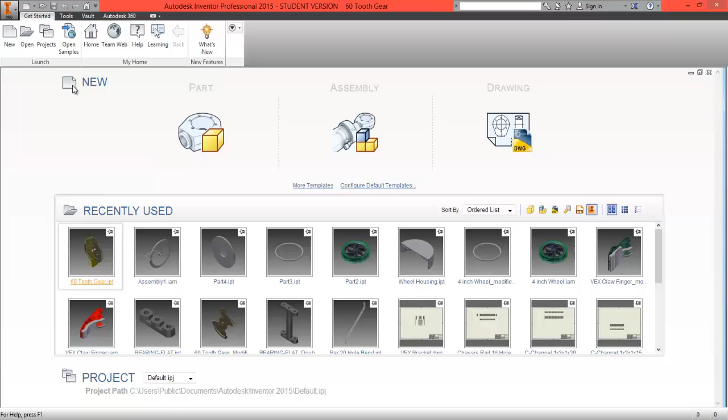In this video we're going to look at modifying some of the existing parts. One of the first parts we're going to look at is a gear. One of the gears from the existing CAD library that you have available is the 60 tooth gear. Click on open, locate the 60 tooth gear and open that file up.

Now, just to explain a couple of things about the existing parts. First of all, on the left hand side you have the iMates, and the iMates are the features that allow you to snap assemblies together. They're some of the features that will kick in during an assembly stage.

We have the base part, as you can see here, base 1, and if we were to expand the extrusion we'd see that effectively this model has been surface modelled, so it's not something that's very easy to look back at and modify. For example, it's not made up of consistent extrusions and cuts and revolves.

However, the part is available to add and subtract material from, because it's still now technically a solid part, and it has a number of features that allow us to do this.

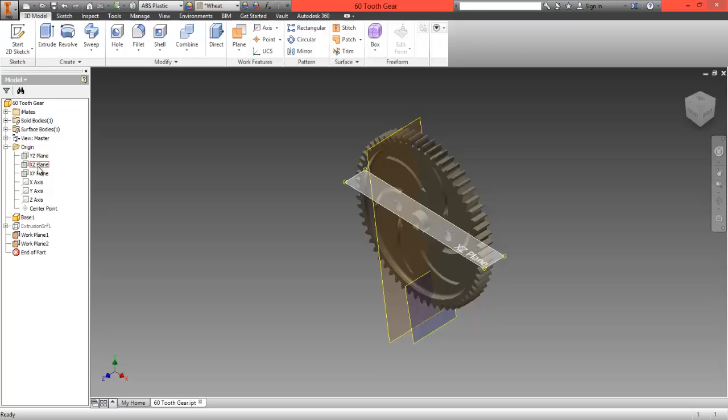For example, on the left hand side under origin we have the X, Y and Z planes and the X, Y and Z axes. Each of these allow us to produce sketches and allow us to revolve things. If we look at these two work planes featured here, click on this view cube on the top right corner and drag around, we can see that a couple of work planes have been created as well, which could help us to sketch a model.

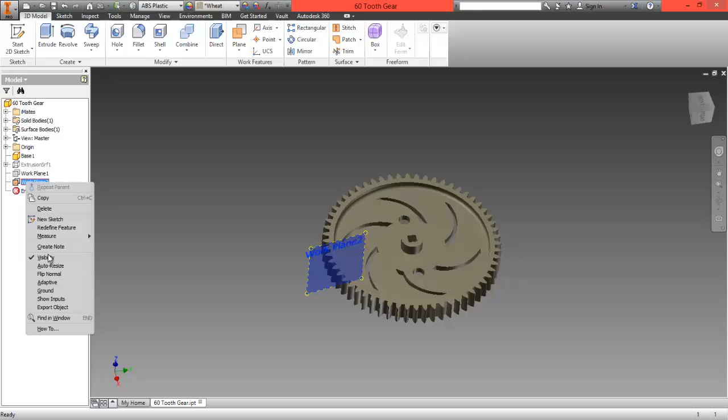One of the things I'm going to do here is right click on those work planes and untick their visibility to just clear up the view that I've got at the moment, and now I can look at the product properly. Now this part would 3D print absolutely no problem at all.

We can see that if we were to 3D print on the bed, this piece extrudes down below the surface, so then we'd have a large amount of support material just sitting underneath to allow it to 3D print. At the moment it's just an existing part, so it just replicates one of the injection molded parts that we already have. What we're going to do here is just do some very simple things to modify this part for an alternative 3D printed part.

So we can create in the top left corner on the ribbon a 2D sketch. Now there's lots of different things that we could select to do our sketch. We could click onto the surfaces, so we have numerous surfaces here, including this top edge here if we wanted to modify some of the existing features. We could click onto this surface here, or even the internal one.

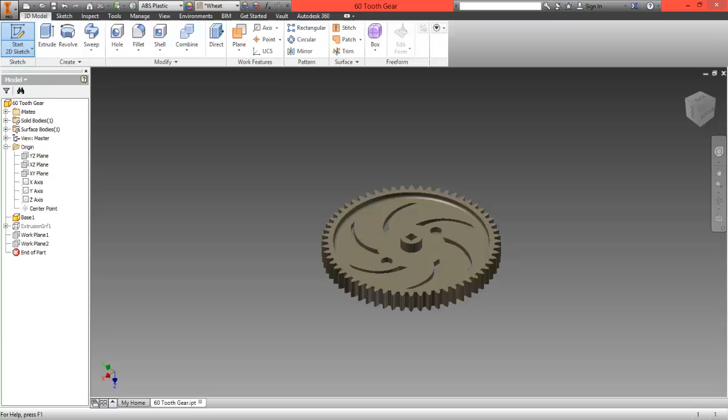So for example, if we want to actually modify this section here, we click on here and then it will rotate through to a 2D view. We also have on the left hand side the origins, so we can choose the YZ plane, the XZ plane and the XY plane, and we might like to sketch onto these, especially considering some of the planes intersect straight through the middle of the various different parts of this design.

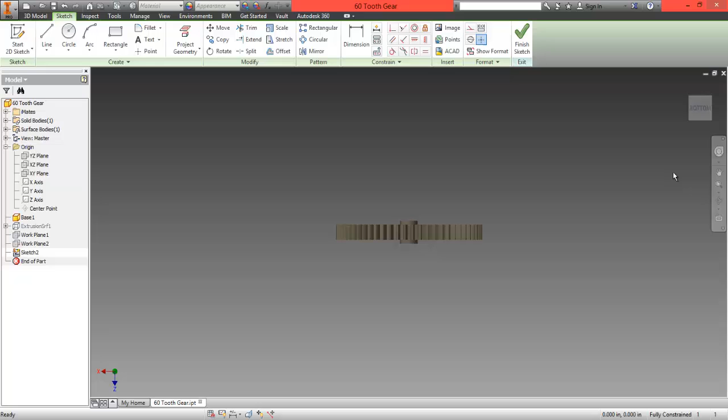In this instance what we're actually going to do is choose this middle plane, the XZ plane, and just select on that. Now this gives us opportunity to sketch right along the cross section here. I'm just going to rotate this round to the 2D view, and what we can do is sketch some kind of design feature onto this.

What this design feature is, is completely up to you. For example we might decide to sketch a series of additional extrusions. You'll notice that as I draw this circle I've managed to snap to the existing circle that is already featured here. If I click away from this momentarily, each of these pieces of line work are things that we can snap to. So if there are certain features you want to continue on from or to modify around, we can snap to these and use those as reference points.

We can also use project geometry, and under project geometry we have project cut edges. We can use these to make the geometry appear available, and here in yellow line work we can see what we actually have to snap onto on the very surface we're working on at that time.

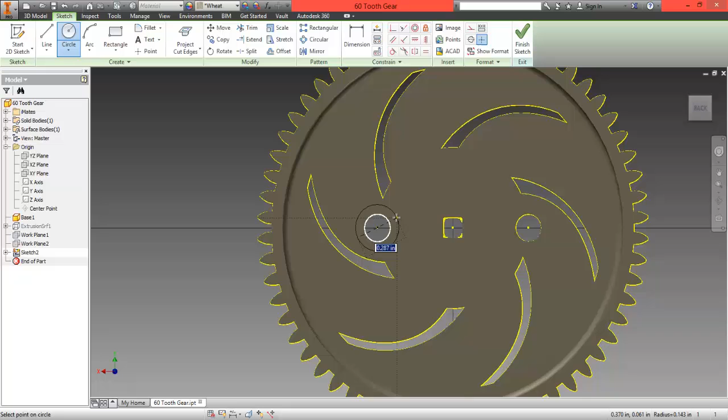What I'm going to do here is very quickly model a couple of circles, the first one here and the next one there.

If you're drawing your line work on a datum plane or surface that sits inside the physical product, you can press F7 and it will do a slice of the product, removing the material that's in your way. Now I can see my line work quite happily, plus all the cut projected edges as well.

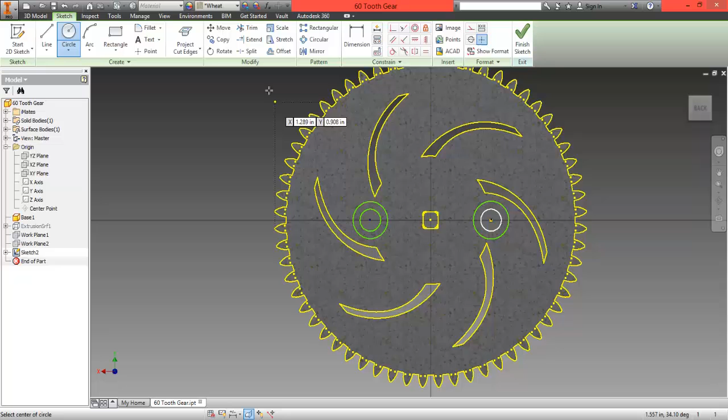So I can continue my line work, and this will probably end up looking like green line work because we're not working parametrically yet. If we set dimensions to each of these we will have some parametric modelling going on.

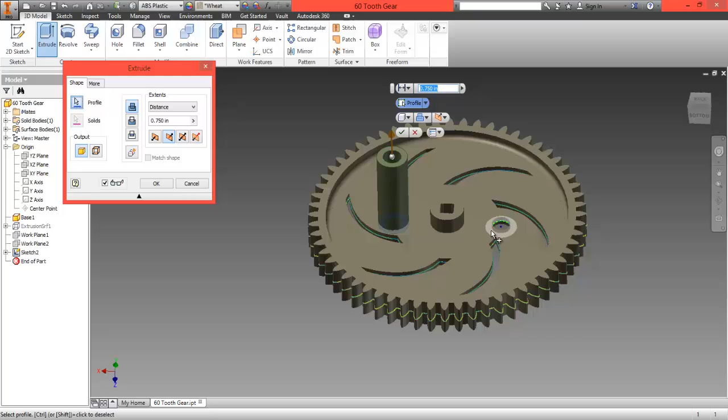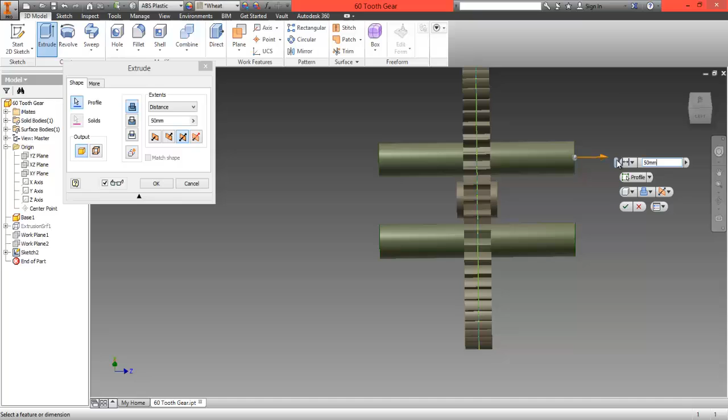All I'm going to do for now is produce those two pairs of holes. I'm going to select extrude, and what I'm looking to do here is select the parts I want to extrude, this part here and the corresponding one on the other side. Because we're sketching onto the centre plane that intersects right down the middle of the part, I'm going to modify the extrusion so it goes in both directions, and I can drag this out to a useful distance, or even type it in, so I could say 50mm is what I want to extrude to. Tick that, and then I have my 3D extrusion, and I've modified this part now.

What it does is up for debate at the moment, but what I have done is managed to add additional material to this. I could also then continue to model on top of this.

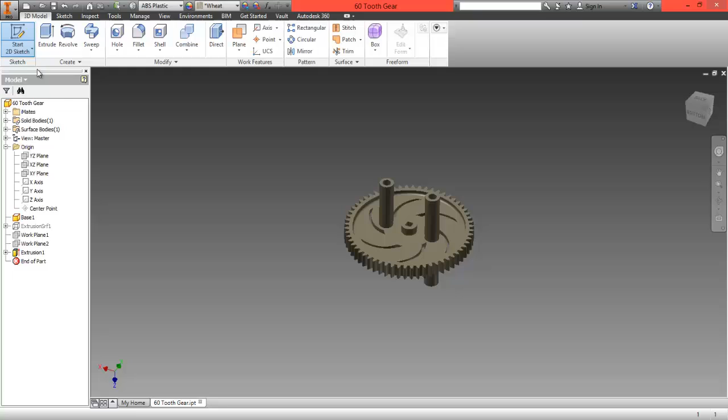So for example, if I take a sketch, I could sketch onto this surface here, and maybe what I want to do this time is just sketch a few bits of line work that are going to kind of match the current product. I'll finish the sketch in a second.

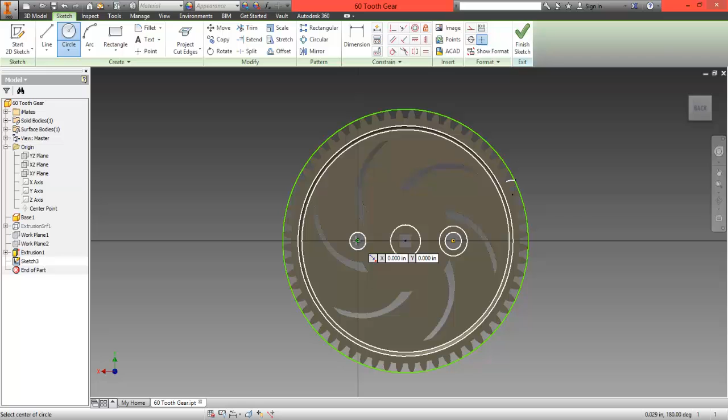Let's just add a few more holes. Finish the sketch, and then I could choose to extrude this one as well.

Maybe I want to do this just 2mm, which would be a good amount to 3D print. And now I have some kind of side plate, perhaps a mounting system for a motor, who knows. But I've managed to modify the existing part by adding material.

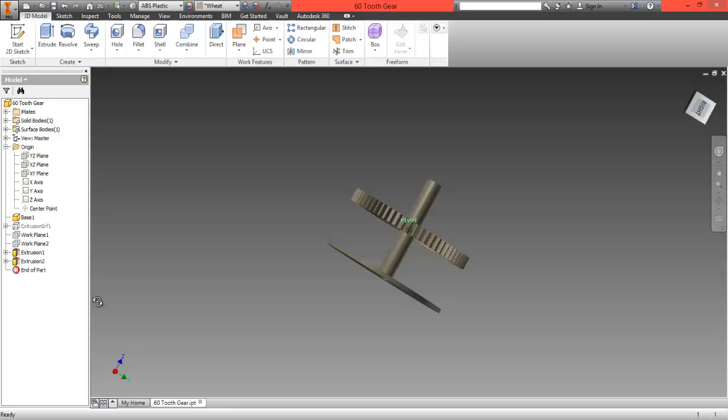I can also remove material, not only from the additional part I've modelled and added, but also from the existing design. So let's say I wanted to create a 2D sketch onto this surface, and I decide I want to remove a large amount of material here.

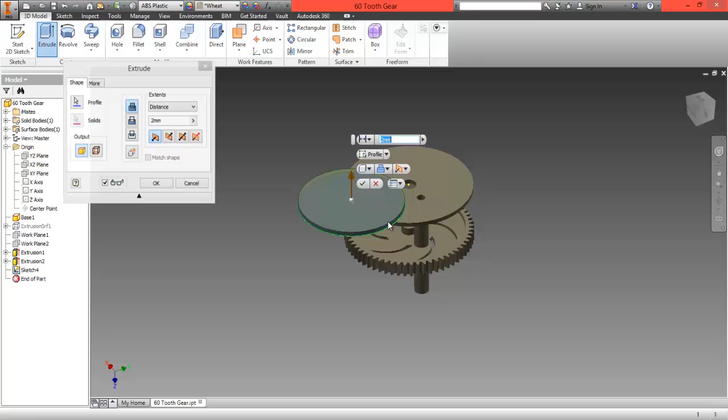I'm just going to draw a simple sketch onto the surface, choose to extrude, and I'm going to pull it through all of the material and all the parts. Make sure it's selecting to cut rather than to extrude, and click OK.

And what I've done now is I've managed to remove both my new material and my existing material from the part that I have. What this part does and what it's designed to do functionally is completely up to you.

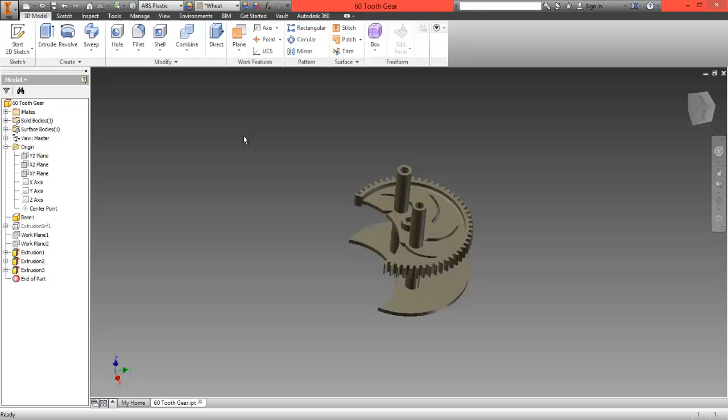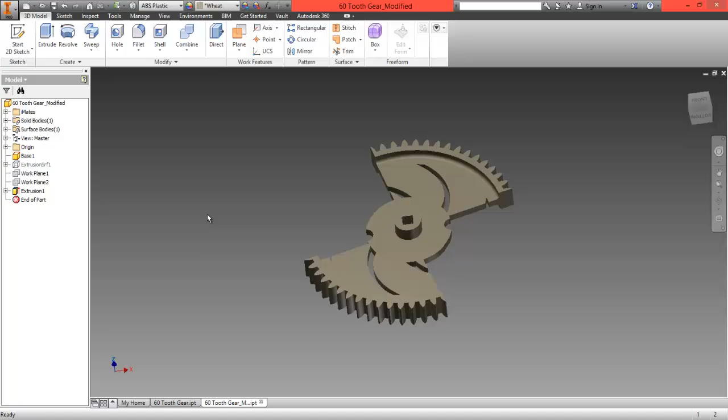And if this gear was attached to a motor and then there were subsequent gears attached along in a gear chain, what would the function be? How would it change? How would it make the robot react differently? These are the things where modifying existing parts might get you to think very differently about how your robots function. Have a play with the gears, have a play with some of the tools such as the sketching and the extrusion, and see what you can produce.